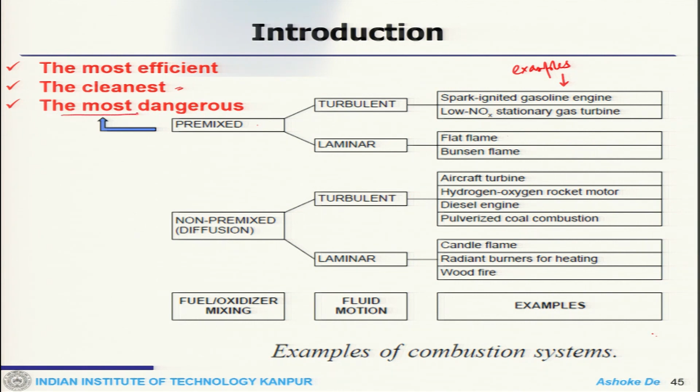And when you come down to differences, one of the important things about premix flame is they are quite efficient, and also not only that, they are the cleanest combustion that one can have. But at the same time, as I keep saying, nothing comes free of cost - this is also quite dangerous. And why can it be dangerous? Because we have already seen some examples where instability actually triggers.

Now, another side of it is the non-premix flame, where this kind of problem may not be there, and this could also be laminar or turbulent in nature, where you have candle flame, wood fire, and these are aircraft engine, rocket motor, diesel engine - these are the things.

So this classification is based on your fuel oxidizer mixing and the fluid motion. But at the same time, when you look at the non-premixed or diffusion system, they are always stoichiometric - that means the reaction zone of the combustion takes place at the stoichiometric situation. They are obviously less clean, so the problem of emission becomes quite dominant here, and that is why one has to control it.

At the same time, they are less efficient, but you get some benefit - it is also not that dangerous. So that means controlling a premix flame is quite challenging compared to a non-premix flame. Control of a non-premix flame is not that straightforward as one can see.

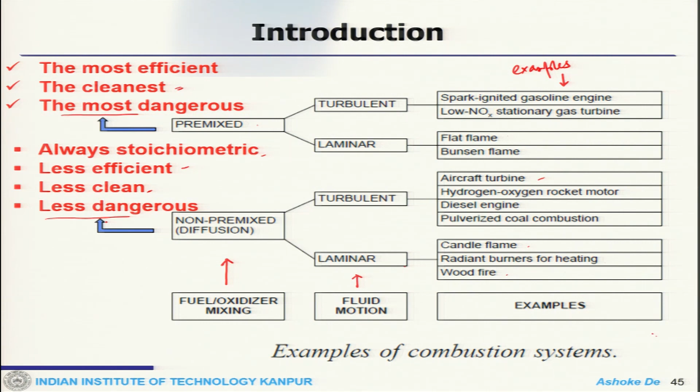Now this is again an image which clearly shows a simple diffusion flame, and this is methane burning here - from this side you have a diffusion flame completely, and on this side you go to a premix system. That means from diffusion, slowly you transition, and in between there would be something partially premixed, then you go to premixed system.

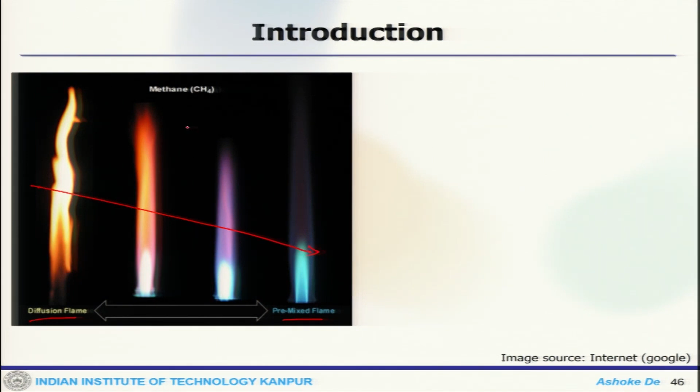The important observation one can have is the flame structure, then shape, color - these are the visible differences one can have. This yellowish line and all these things represent an unburned situation. In the premix system, you can have a clearly nice blue flame, meaning everything is getting burned. In the non-premix case, there is a lot of unburned hydrocarbons, which is why you get this yellowish nature.

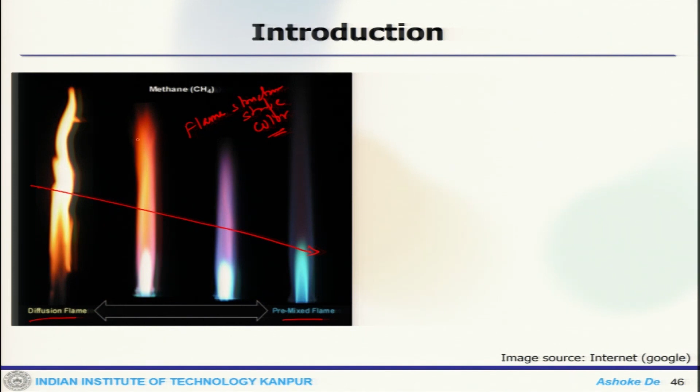Now usual practice - you need to store your reactants separately for safety, but you may burn them in premix mode for performance and pollution control, because as I said, premix flames are quite efficient. That means you have better performance and the emission is not that high in premix flame, but at the same time your device needs a fast mixing system.

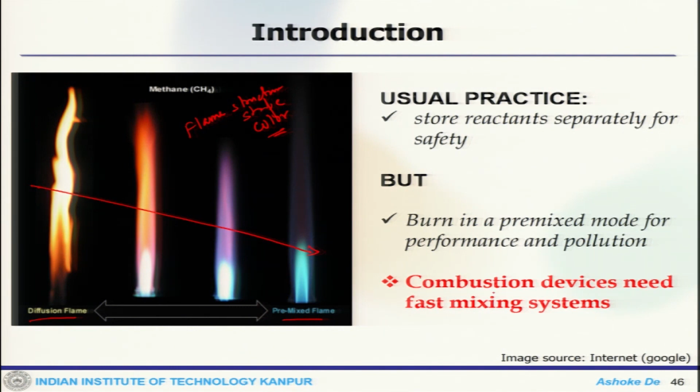So there are issues which can lead to problems which usually happen in LP systems, that means lean premix systems. One of the biggest problems is instability or flashback problem.

So the question may come - why would one like to have a lean premix system? The lean premix system advantage is that it reduces NOx rapidly with the flame temperature. This is a schematic of that kind of premix system, where air fuel is mixed and injected into the chamber under swirling condition, then secondary air comes through, tertiary comes through.

But the lean system has a problem, and this is another example where methane is added with different percentages of hydrogen, and you can see the upstream portion of the injector how the flame actually moves. There is a movement of flame, this is called flashback, or in this particular example you can see there are some waves which are generated.

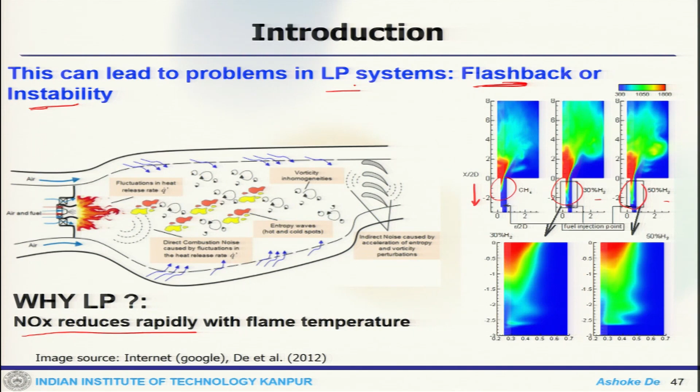That will lead to some sort of instability problem, called combustion instability. So on one hand one can expect a lean premix system to have better performance, less pollution, but at the same time it will become more susceptible to flashback or instability, and if that kind of situation happens, this is one of the pictures showing what happens to the burner assembly.

This one is actually damaged, and this is a new one, you can see. It is a nice looking burner setup, but because of this instability or flashback kind of things, it has been completely damaged. So that is why control of premix flame, or the handling of premix flame, is not that easy, it has certain issues, it is quite dangerous too.

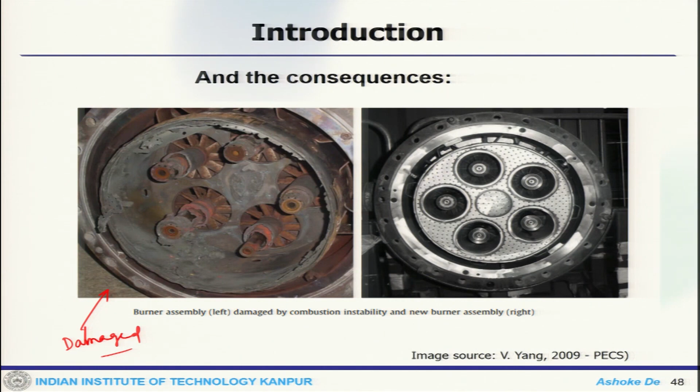Now one can classify things in different ways also. So far we are making the classification based on the flow and how the mixing takes place, that means either premixed or non-premixed mode. Apart from that, one can have a classification like unconfined flames, meaning the flame is not confined within a chamber, or it is not kept within a confinement. So you can have premixed flame, laminar flame, and the other is confined flames.

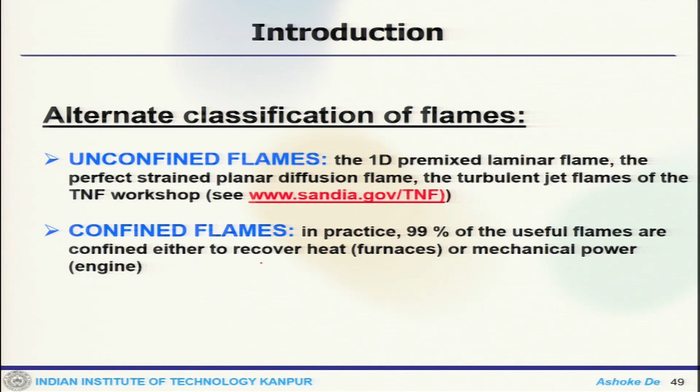But in regular practice, most of the practical systems are confined, either to recover heat or mechanical power. So engines, they are of that nature.

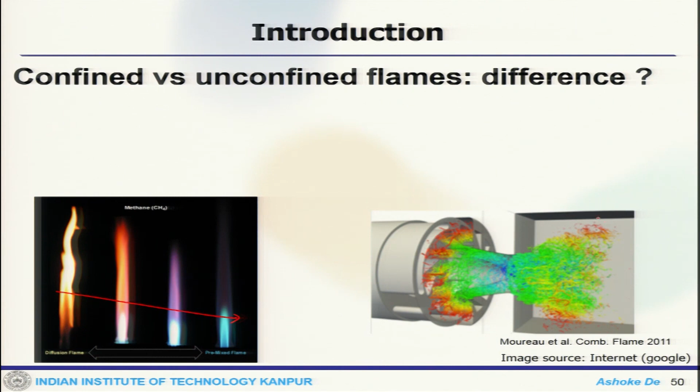Now some examples of confined and unconfined flames, this is the same example where you have a diffusion flame and you go to premix flame. This is the unconfined flame, meaning the burner is exposed to the open air, and this is the image of a confined flame where combustion is taking place within the combustor wall.

So there are some differences. What are those? One of the biggest differences is the velocity field, which is quite different because density changes due to dilatation. So that is one of the important differences between them.

Now in a confined system you have walls, so heat transfer becomes quite important, because once you have a wall, then heat transfer and the cooling of the wall, these issues come into the picture. So it is not that straightforward just because you have a confinement. On one hand unconfined flames have fewer challenges, but at the same time confined flames have certain other challenges.

Another important aspect is that acoustics can become important and also induce combustion instabilities, which are dominating multiple present programs. So people are now looking at this acoustics business seriously, because most of the practical systems are confined in nature, and the confinement brings in some of these challenges.

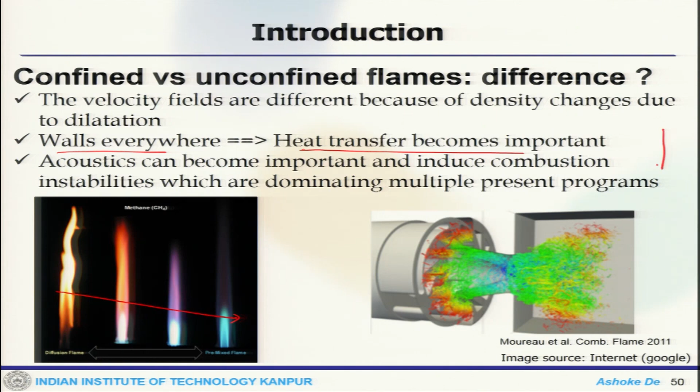So if we put everything together, our topic of discussion would be, in a broader sense, turbulent combustion. We will look at both the basics and theoretical aspects along with the modeling aspect. That means when you look at turbulent combustion with its modeling aspect, everything requires theoretical discussion on the basic flame types, that is, laminar, premixed and non-premixed flames, which we will do first.

So to do this, the first discussion would be on laminar flames, and after laminar flames we will move to turbulent flame. Before doing turbulent flame, one has to make some discussion on turbulence.

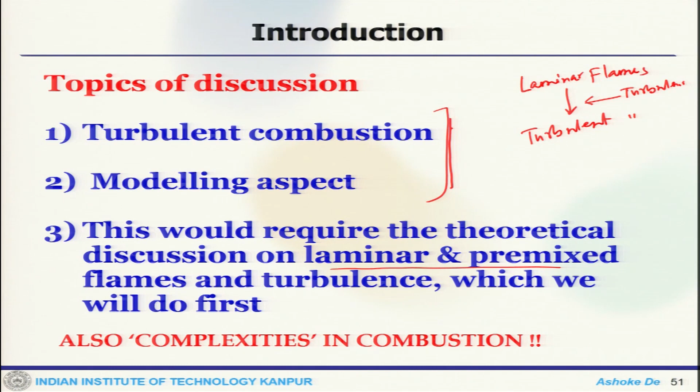So that is the whole point, but there are complexities in combustion also, and how do we look at it. There could be different ways of complexities. Number one, the complexity comes from the kinetics or the chemistry. If you have more detailed kinetics, or you are burning a particular fuel which is really complicated, that can be represented by some thousands of reaction steps, then the chemistry can become a real issue. Then there is geometric complexity.

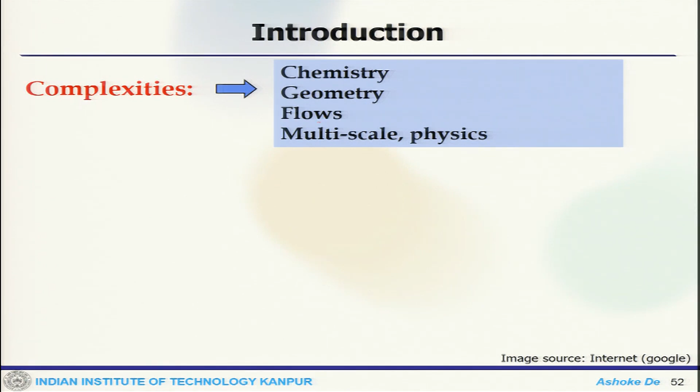So, real life burners or combustors have a lot of small components. Geometric complexity could be one of the features. There could be complexity due to flows, and finally there are multi-scale issues.

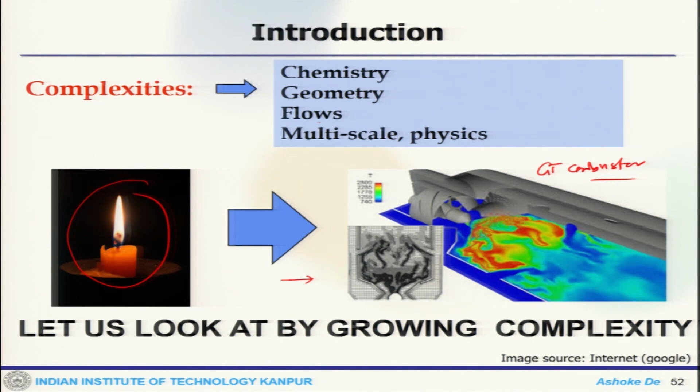Just to give you a glimpse, a simple candle burner is one of the simplest burning systems, and if you go in the growing complexity direction, you reach the gas turbine combustor, where everything is happening together. That is a growing complexity situation, with a lot of scales and lot of different physics taking place in that combustor.

Now we look at some basic flames, like 0-dimensional flames, where all variables vary with time. You have fuel and air, and temperature is a function that has a reaction source term in the temperature equation. There is also the species mass transfer equation, which has its own reaction source term.

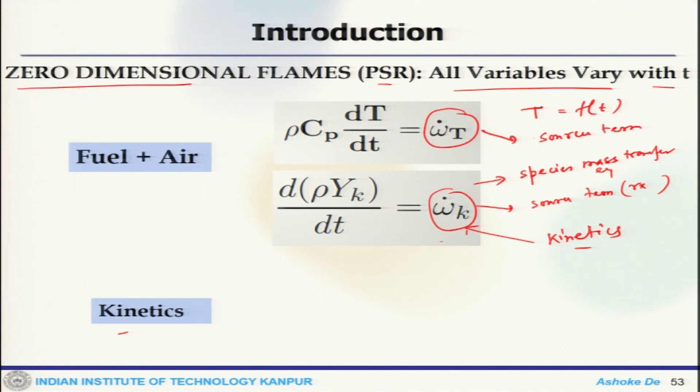This comes because of multiple reaction steps. In a 0-dimensional flame there is no geometric complexity, flow variables vary only with time, so that complexity is not there, but the kinetics brings in complexity through this reaction. Even in a 0-dimensional flame, modeled as a perfectly stirred reactor (PSR) where fuel and air vary only with time, complexity comes from kinetics, and also because kinetics is connected with the temperature equation or thermochemistry. These two things are quite important even for a simple flame.

In the previous case, fuel and air come into contact and there is a flame sitting there, so kinetics will be there, along with thermochemistry and the connectivity between kinetics and thermodynamics. One more important thing that now comes into the picture is transport, because now things are transported, adding that complexity.

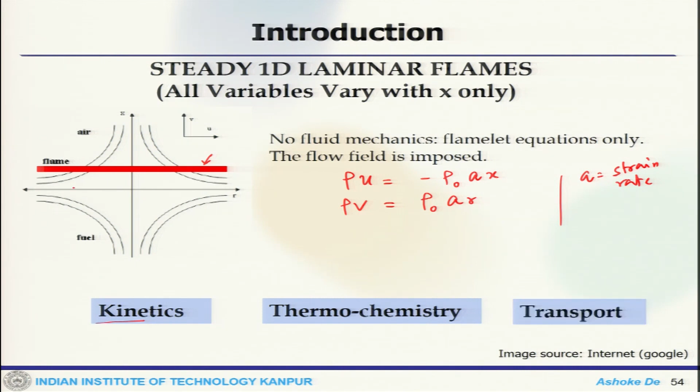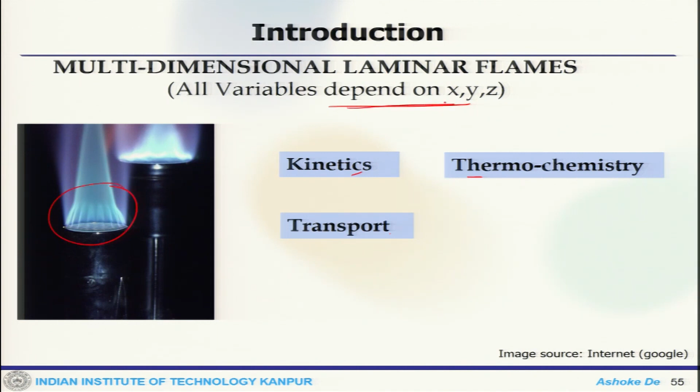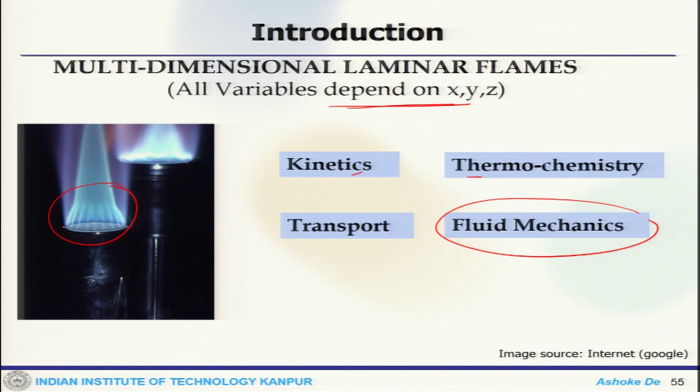Now we see how things get complicated. This is another laminar flame seen in a gas burner or regular laboratory scale burner, but it's multidimensional, so variables could depend on different directions: x, y, or z. Important factors now include kinetics, thermochemistry, and transport. When multidimensional, things vary with x, y, z, and another important behavior that comes into the picture is fluid mechanics. So one physical process after another gets involved, making the system more complicated.

Now we come to a turbulent unconfined flame, where things are transient in nature and depend on x, y, z simultaneously. This is a turbulent flame at laboratory scale. This is a real flame from the oil and gas industry, like in refineries, where you see this kind of flame. Things involved include kinetics, because combustion is taking place, transport process, thermochemistry, and fluid mechanics, because these are turbulent.

On top of that, turbulence comes into the picture, which brings extra effort to be handled, along with the scales. Since these flames are so turbulent and involve multiple scales, there could be radiation, with huge radiative heat emitted from these flames.

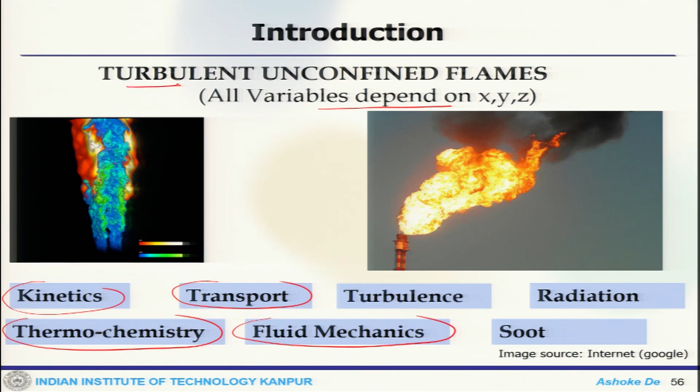Finally, most of the time if you are burning hydrocarbons, there could be soot particles, which are the black particles. Now you can see how things get complicated. As soon as you move from a laminar situation to a turbulent one, even an unconfined flame becomes involved with so many different processes, which makes things complicated.

Now, when you go to a turbulent confined flame, this is an example of your gas turbine combustor. Here you have all this information: kinetics, transport, thermochemistry, fluid mechanics, turbulence, radiation. Soot depends on a particular mixture and fuel, and at what temperature soot may arise or may not, but what could arise is a different kind of complexity.

One is the acoustics - because of some instabilities this may trigger in, then heat transfer at the walls, and then because of the wall heat transfer, there could be thermal loading on the combustor walls, liners, and everywhere. So those materials can also be exposed to some sort of small deformation, where fluid structure interaction will also become important.

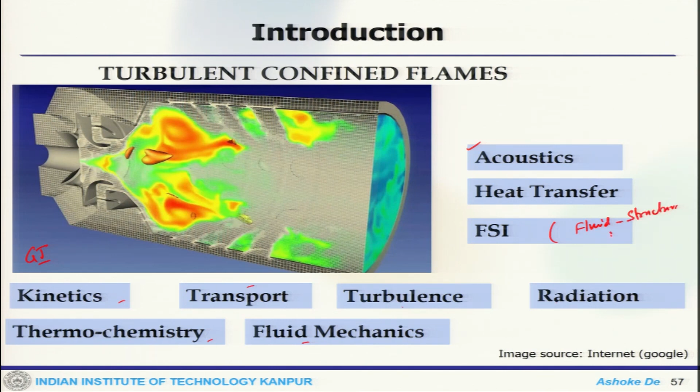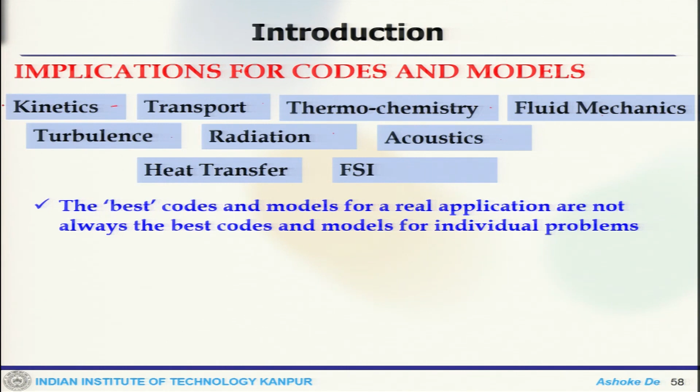Now, implications for the models and different codes - you have so many parameters: kinetics, transport, thermochemistry, fluid mechanics, turbulence, radiation, acoustics, heat transfer, FSI. So everything has to be handled. How can one handle that? One of the best codes or models for a real application is not always the best code or model for an individual problem. So you may have everything incorporated in one particular model, but that may not be the best one for your specific application, though it is good for a realistic situation.

Then the limiting part of the code would be the weakest element of all of them, especially for real applications. So one has to identify the weakest element. Depending on the expertise, one can see the weakest link at different places, and accordingly has to resolve those things. This gives you an idea why the combustion process is so complicated, because it involves so many processes at the same time, and once you have so many processes involved simultaneously, things become really complicated.

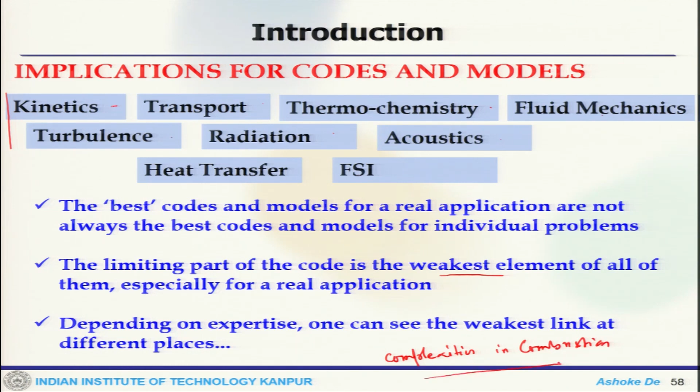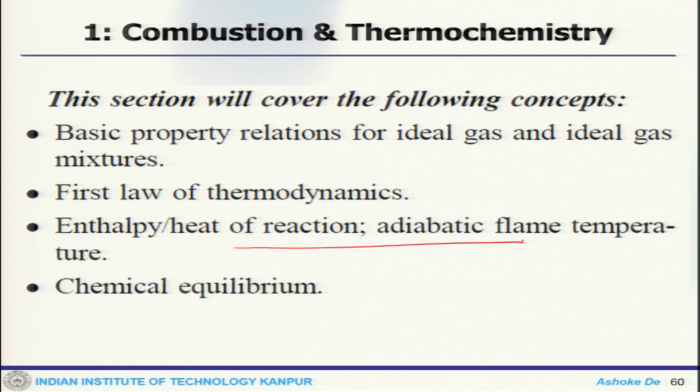So these are the complexities of combustion that we need to handle. Now we will start with some of the basic things like combustion and thermochemistry. We will develop our discussion on the basic stuff, then move into the detailed discussion of the complicated things. What will we cover here? We will look at basic properties, then the first law of thermodynamics, enthalpy, and some basic properties of flame, and finally chemical equilibrium.

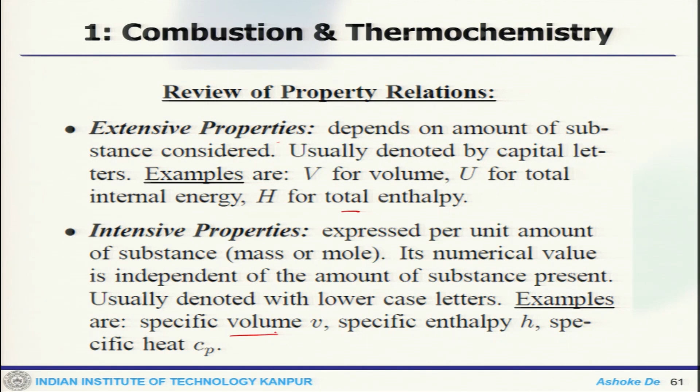You should already have some background on thermodynamics or basics of combustion. You must know there are property relations: extensive properties and intensive properties. Extensive properties depend on the amount of substance considered, for example volume, total internal energy, total enthalpy. Intensive properties are expressed per unit mass, for example specific volume, specific enthalpy, and so on.

Intensive properties also include temperature and pressure, and extensive properties are related to intensive ones by the amount of mass. For example, mass into specific volume gives you total volume, and mass into specific enthalpy gives you total enthalpy. So they are connected - the intensive properties and the extensive properties.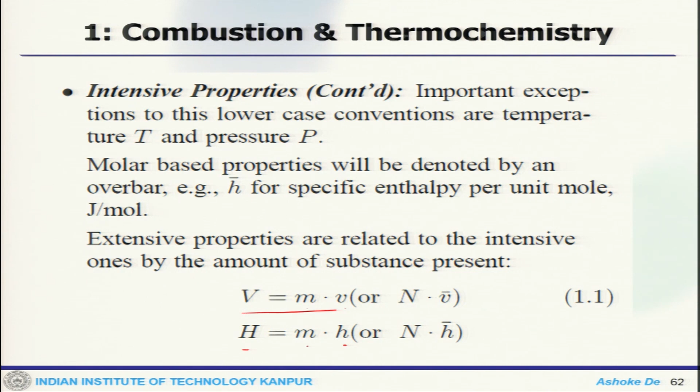Now the other thing we have already looked at is the required equation of state. Most of the time, unless otherwise specified, we will be dealing with ideal gas behavior. This gives you a relationship between pressure, density, and temperature. An ideal gas behavior tells you that intermolecular forces and volumes are ignored. So you have PV equals N times the universal gas constant times T.

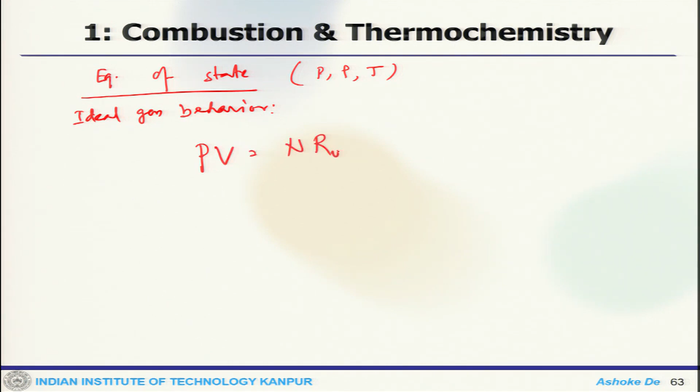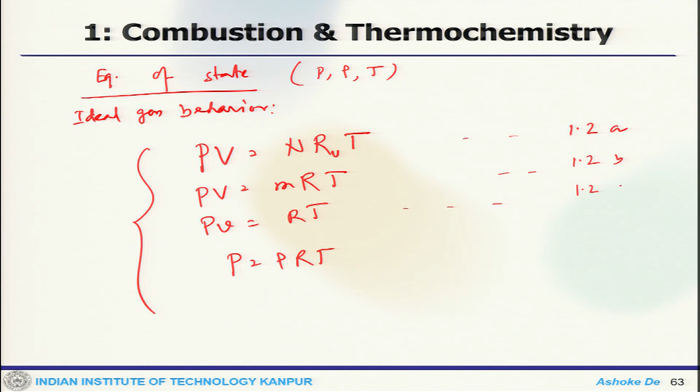So, one can say this is our equation, PV equals to, you can write in different terms. So, P small v is RT, P equals to rho RT. So, these are different forms one can write the ideal gas law or the equation of state, and we can use it in different forms.

Now, there is a specific constant which is the universal gas constant, Ru, or rather R is Ru by molecular weight, which is nothing but 8.314 kilojoule per kilomole Kelvin. And Mw is the molecular weight.

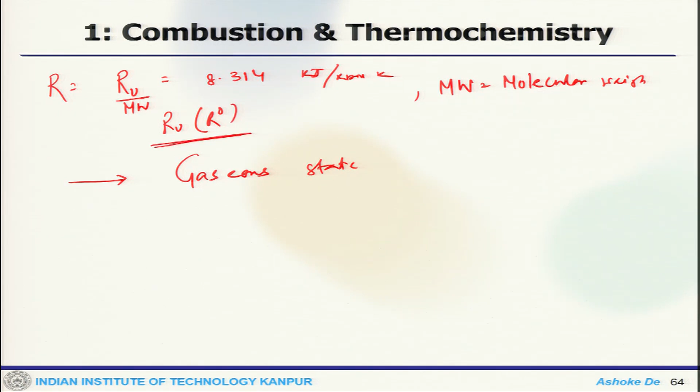So, most of the things that we will show throughout our lectures will mostly deal with the gaseous state. So, we will require this gas law and we will be using this different gas constant, somewhere as Ru or R naught, whatever it is. So, that is what we use throughout this discussion.

Now, there will be another thing which one can write, which is the calorific equation of state, which essentially relates the enthalpy and the internal energy to pressure and temperature. So, your internal energy becomes a function of temperature and specific volume, and H becomes a function of pressure and temperature. So, these are my equations.

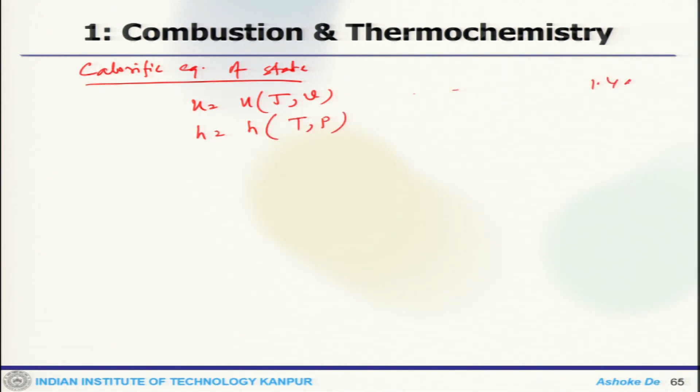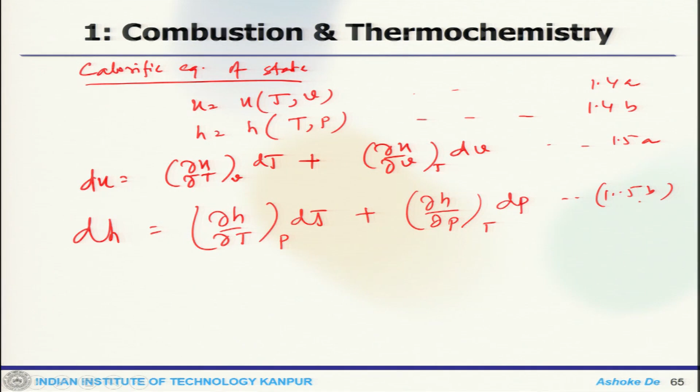Now, once we differentiate these two equations 1.4a and 1.4b, we get du equals to del u by del t at dt plus del u by del v dv, which is 1.5a, and dH equals to del h by del t at dt plus del h by del p dp, which is 1.5b. So, once you do the differentiation, then you get this.

Now, from 1.5a and 1.5b you can write Cv equals to del u by del t at V, which is 1.6A, and Cp is del H by del T at P, which is 1.6B.

Now, for ideal gas, del U by del V at constant temperature is 0, and del H by del P at constant temperature is also 0.

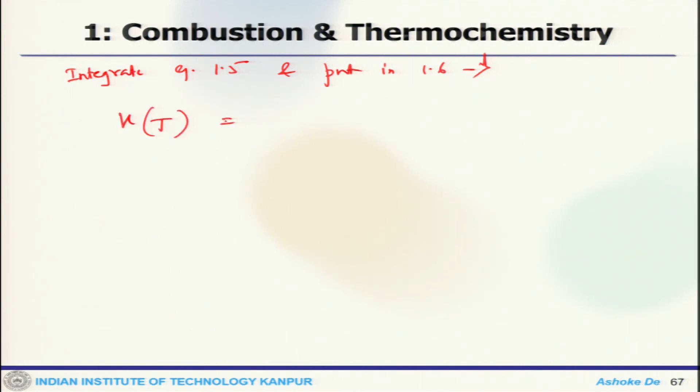Now, we integrate equation 1.5 and put in 1.6. That will get us u as a function of t equals to u ref plus integral from t ref to t of Cv dt, which is 1.7A, and h(t) equals to h ref plus integral from t ref to t of Cp dt, 1.7B. So, here we have some reference.

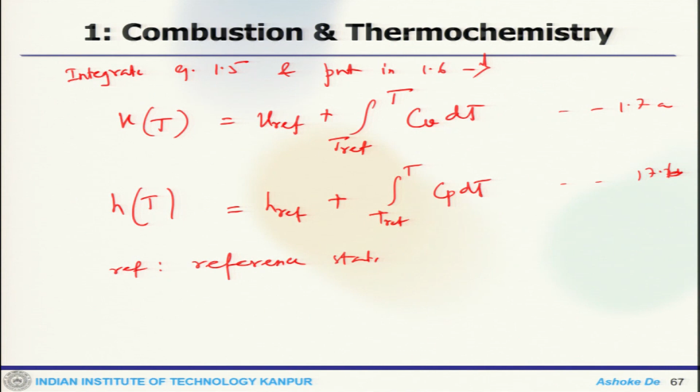So, ref stands for some reference state, and we will define that reference state as we go along.

Now, for both real and ideal gases, the specific heats, which are Cv and Cp, are generally a function of temperature. Now, internal energy of a molecule, how one can look at it, these are essentially the translation energy, vibration energy, or rotational, and temperature dependent.

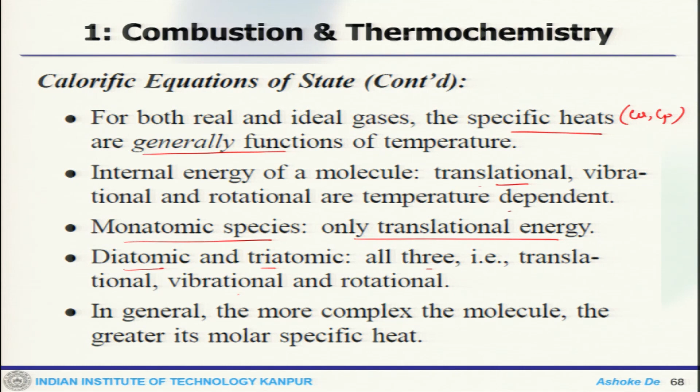Monoatomic species, only translation energy would be involved. If it is diatomic or triatomic, all three, like translation, vibration and rotational energy, will be involved. So, more complex the molecule, the greater is the molar specific heat.

So, now if you go to the ideal gas mixture, we will find out the mole fraction, which would be Ni divided by summation over J of Nj, which is Ni by N total, and mass fraction for ith species would be Mi divided by summation over J of Mj, which is Mi by M total.

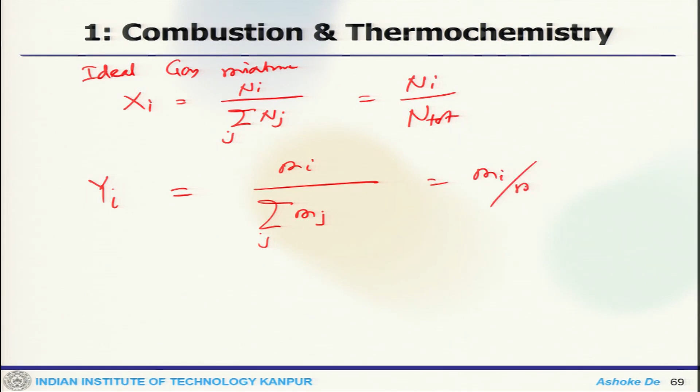Now, for this ideal gas situation, looking at the mole fraction and mass fraction, one can find out that summation of xi is always 1, and summation of yi is always 1. So, these are the two important properties, equations 1.10A and B.

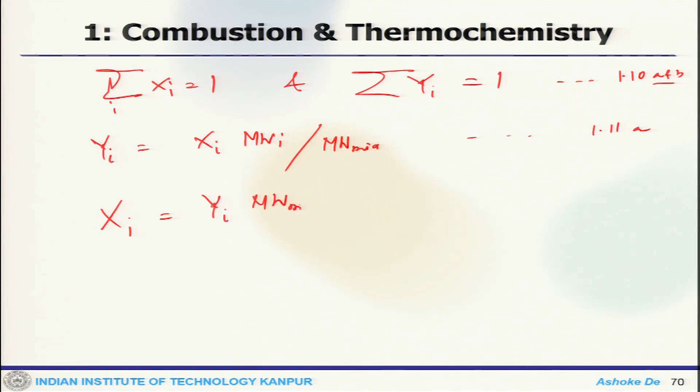And the relationship between x and y: yi one can write as xi times molecular weight of i, divided by molecular weight of the mixture, which is 1.11A, and xi equals to yi times molecular weight of the mixture divided by molecular weight of i, which is 1.11B.

Now, how we define the mixture molecular weight: MW mix would be summation over i of xi MWi, and MW mix is also 1 by summation over i of yi by MWi. So, total pressure one can find out, it would be summation of Pi. This would be equations 1.12A, B and 1.13.

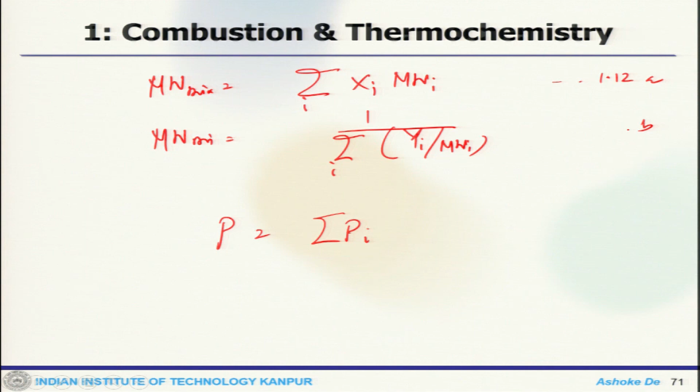So, we will stop here and we will continue in the next lecture.